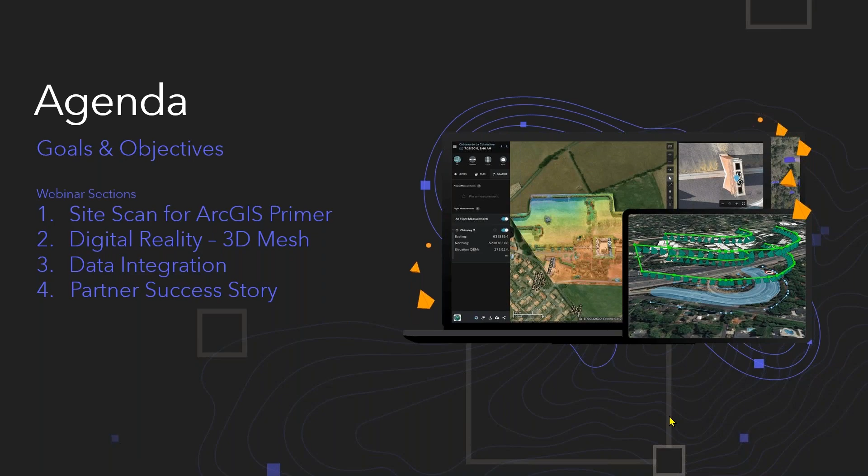So I now invite you to participate in our first poll. You should see the poll question pop up on your screen here. The question is: how would you describe your organization's drone program objectives? Are your drone program objectives focused on documenting and keeping record of site conditions? Do you intend to mostly share your drone data with project managers and key stakeholders? Are you more focused on gaining insights on site condition data, such as volumetric measurements or extracting features, monitoring change? Perhaps you find value in drone data by using it for marketing and brand promotional purposes. And then lastly, maybe you have another initiative for what your drone program objective would be. So if you could please just select your response.

Okay, I think that gives us enough time, we can now close the polls. I'm seeing the majority of you are looking to leverage this drone data to utilize in taking measurements and analysis and monitor change and so forth. It's really insightful, we appreciate your participation. Your feedback is helpful for us.

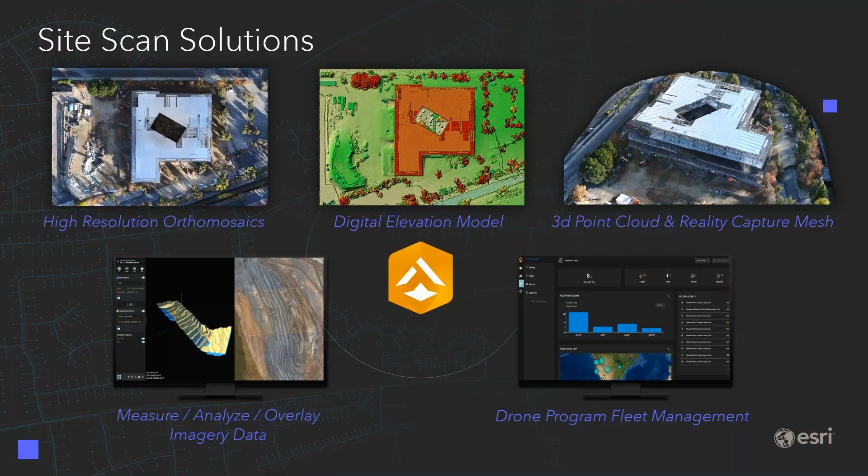Site Scan for ArcGIS workflows can be broken up into 3 distinct steps. Step 1, field planning and image capture.

This iOS mobile application has been built for the Apple iPad. It's built in a way to maximize image management capabilities, planning functions such as 3D mission setup and geospatial layer display.

Step 2, image data loading and management. This cloud-based interface contained within Site Scan has all the permission and account details set up, as well as the image management and processing engines that produce the aerial intelligence.

And step 3, data sharing, integration, and dissemination. This includes direct connections into core Esri software applications, as well as advanced image processing tools like raster functions and GeoAI. This includes automated image detection and feature extraction, as well as direct integrations to partner software portals such as Autodesk.

Now, I'm going to go into a little bit more detail about each one of these steps and the basic workflow. I'd like to highlight in the following slides more key functions of these features that relate directly to the webinar.

The Site Scan for ArcGIS mobile application is built on the ArcGIS Runtime SDK, and it contains pre-flight template modes that have been built to optimize and capture drone imagery data that will produce the best results. The flight modes have intelligent collection parameters like camera angle, image overlap, terrain following, and dynamic shape and size considerations.

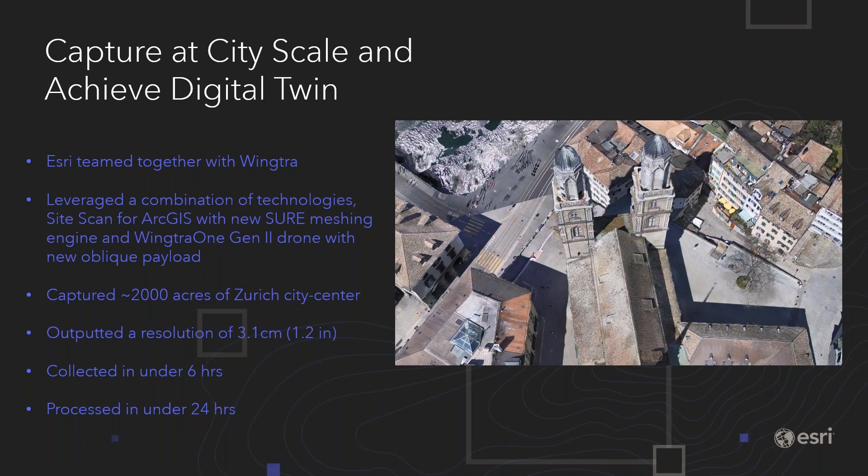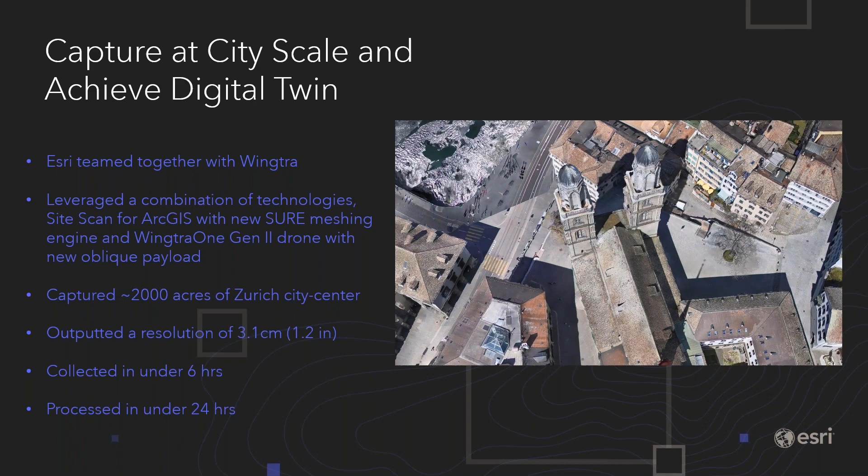More about this use case: the area captured covered over 2,000 acres of Zurich's city center in Switzerland, and it output a resolution of around 3.1 centimeters or 1.2 inches. Perhaps one of the most powerful takeaways from this case study is the fact that the WingtraOne drone was able to collect the imagery in under 6 hours, while the data was able to be uploaded and processed into the Site Scan Manager in just under 24 hours. Site Scan enables a new level of reality capture workflow that allows users to digitalize their environment and enhance the system of record using drone technology.

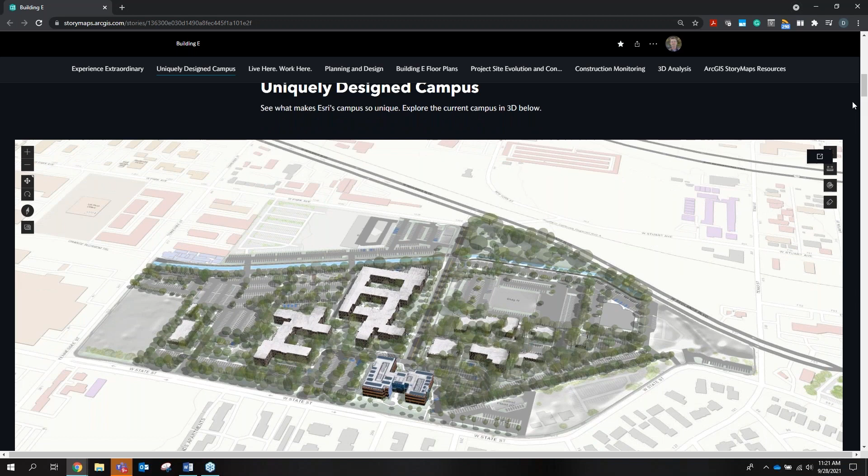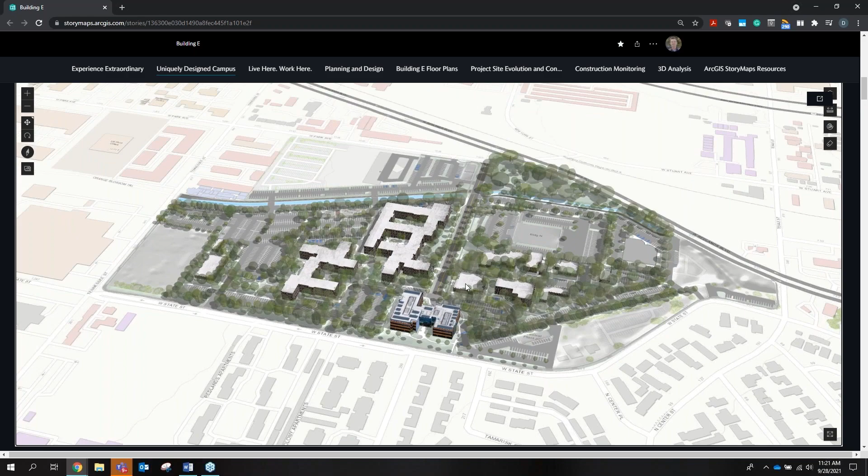So right away, what you see here is a 3D scene, and I will be touching more on the 3D scene capabilities later in this story map. But we want to give our investors, stakeholders, project team, and the public what the current state of our campus is today. We could show that through these very simple 3D multi-patch buildings as well as vegetation.

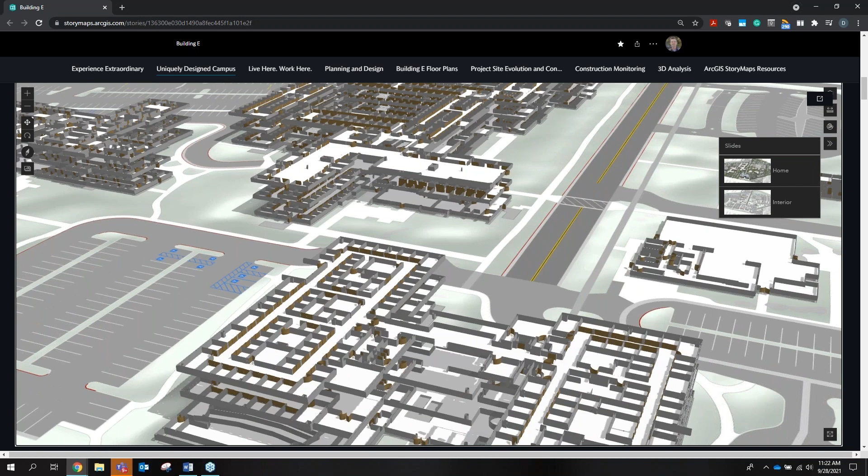What we'll be exploring later is maybe even bringing in the interior space of these buildings with ArcGIS Indoors, to give greater context to the size and contents of these buildings, and where our employees are going to be working at this campus in Redlands.

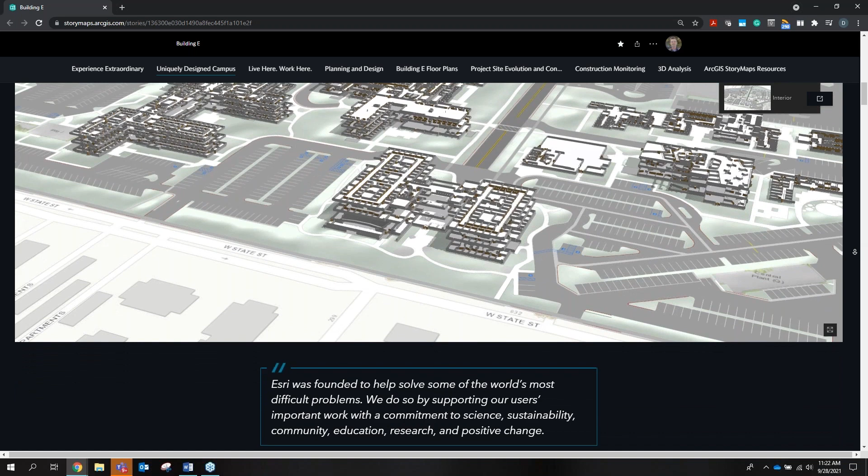So as we move along in this project story, we've now got a great sense of where this campus is and how many buildings we currently have.

Also, a great capability of story maps is being able to bring in dynamic quotes. Maybe we want to describe Esri further, and we also want to bring in more multimedia and photos to really create a story of what this campus looks like from the ground without actually visiting it.

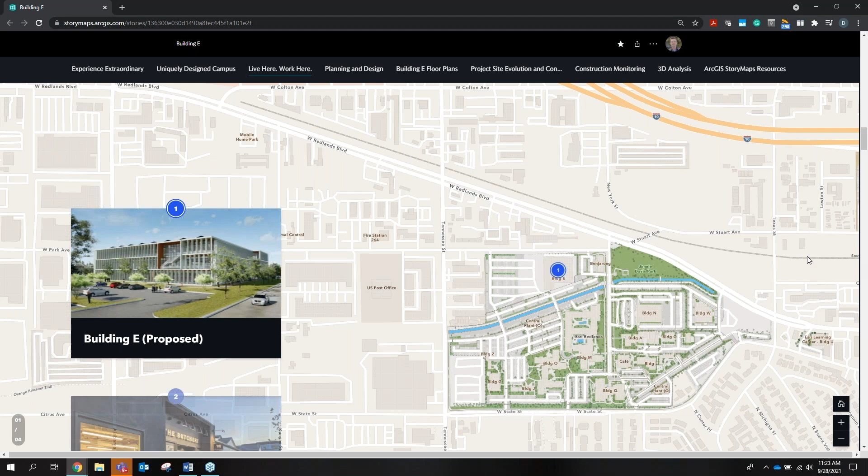Along with that, building is a pretty big investment, and we want to attract new people to this environment, to this campus. So a great storytelling capability built into the ArcGIS StoryMaps platform is being able to build a map without actually any feature services. In this case, we're going to create a guided tour of Redlands.

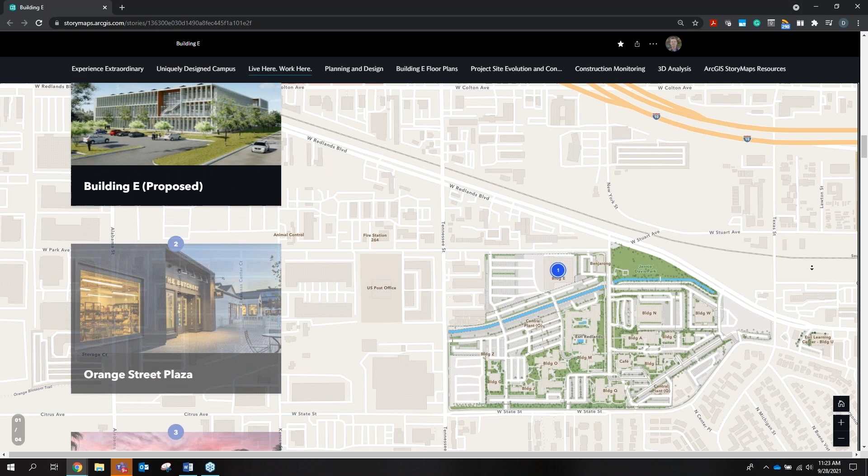So right away, we're showing where Building E is proposed. Maybe we want to showcase where some shops are, where people will want to shop, maybe some entertainment, in this case an amphitheater, or even on this next one, a golf course.

These are all built into the story map telling phase, and you don't need any feature services. You're not even using web maps at this point.

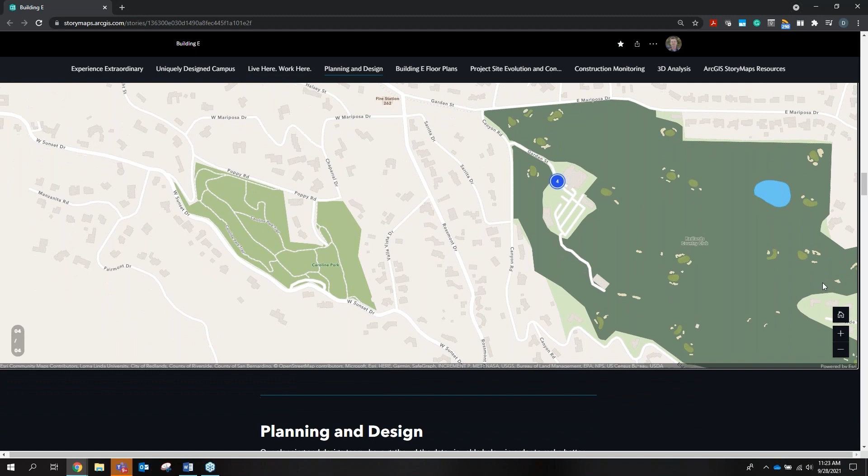But speaking of web maps, here's where we start to talk about the planning and design phase, now that we've gotten public engagement through this part of the story. Now, AECs, if you're familiar, need to have geospatial context. They need to be able to showcase that they understand the environment where these buildings are going in. And as a Sitescan user and an Esri user, you're able to automatically stream your Site Scan orthomosaics into a web map.

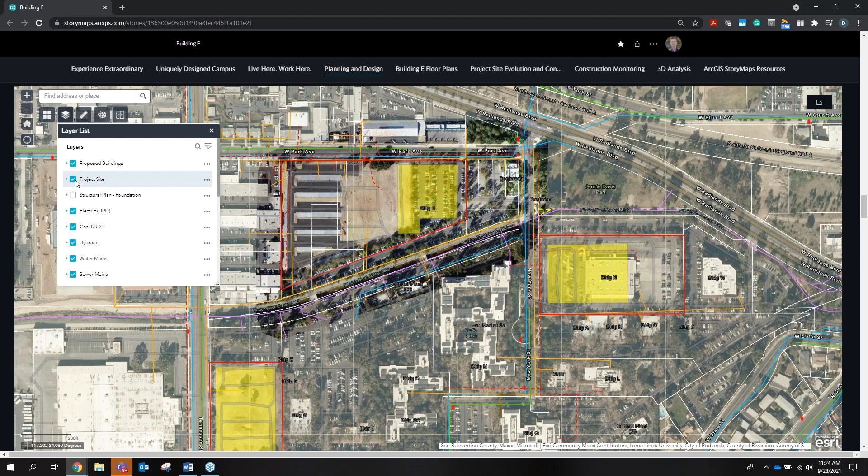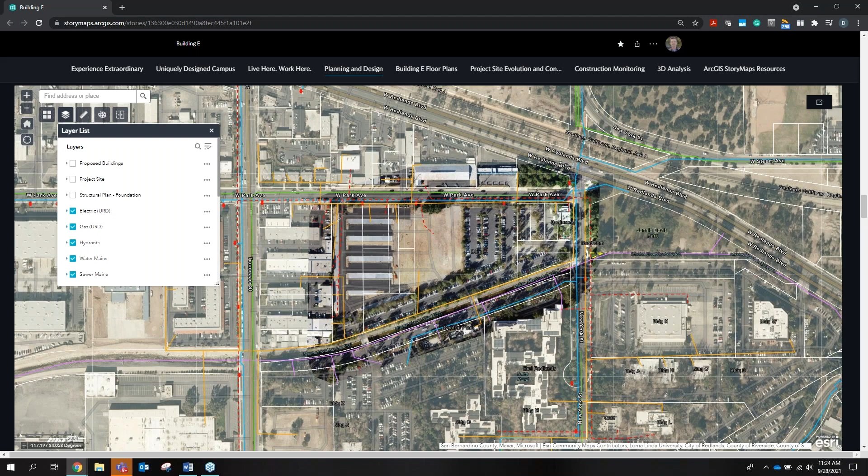Now, what we're looking at here are actually 3 proposed locations where this building may go in this scenario. Now we're going to key in on one specific area, and what you can see in the feasibility stage, you need to be able to showcase your utilities. These can come from your CAD design team, proposed utilities. It can also come from the utility providers as well as public data.

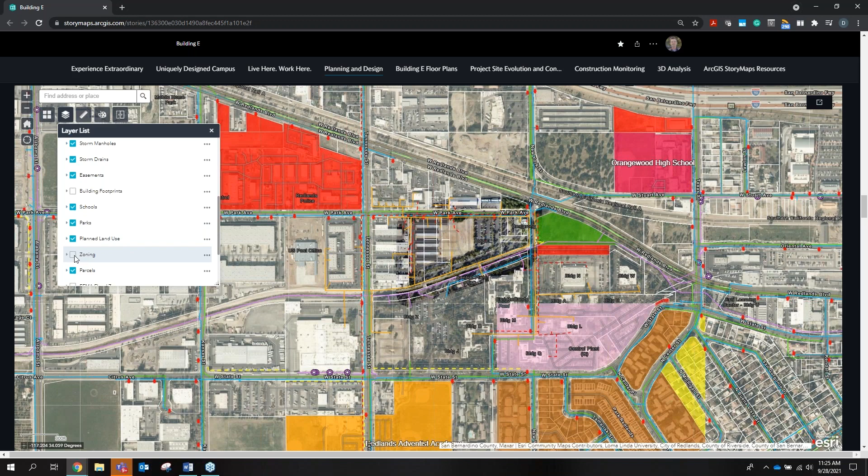So what we're looking at here on this building site is the actual utilities for this new building, but as well as understanding where the utilities are, we also need to understand maybe where schools are, and also parks and land use and zoning. And as an AEC, this really shows that you've done your homework on this site, and combining it with Sitescan just gives greater context to this new building and this story.

So web maps are essential in the Esri environment.

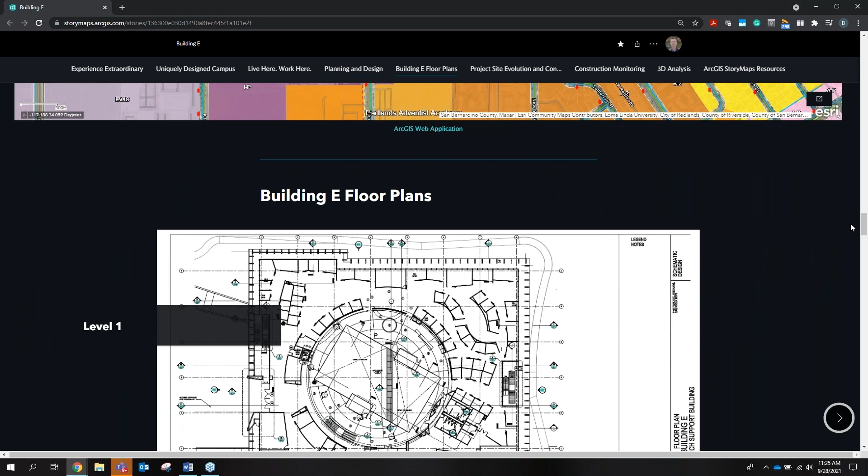Now also along in the story map, we can now begin the planning and design phase of actually being able to attach the building footprints and building floor plans, these PDFs. We're just simply attaching them to the story map to give our investors and stakeholders and public greater understanding of this project.

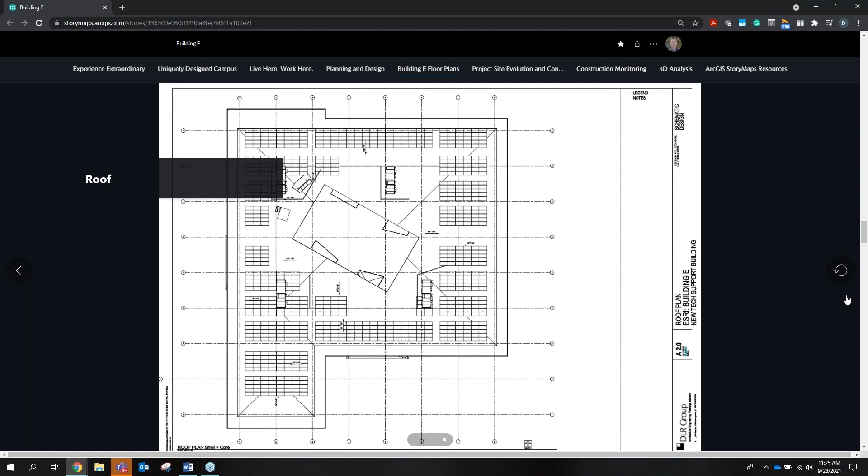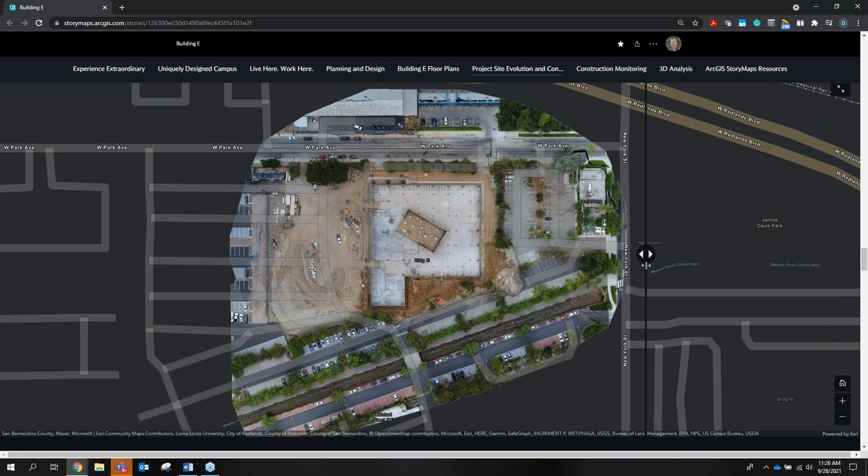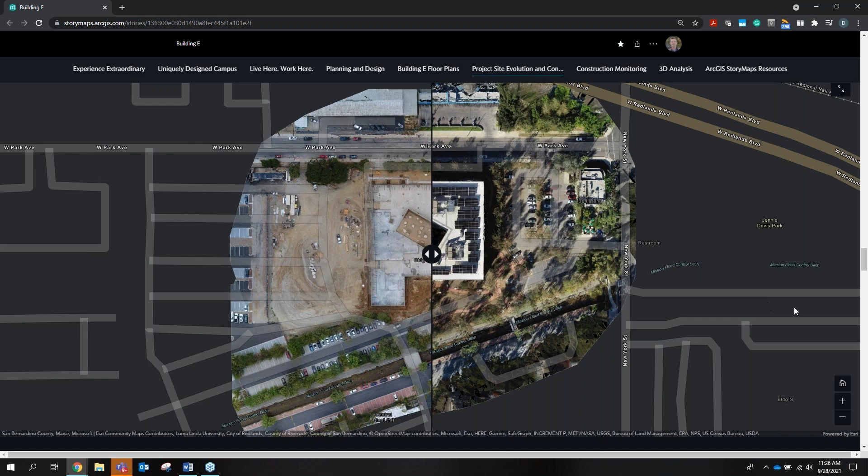So as we move through the planning and design phase, we actually begin construction. And if you're already a Sitescan user, you may be aware of using a time slider to be able to compare the beginning of your construction all the way through the end of construction. You can do just the same in story maps. You can embed your Sitescan orthomosaics along with our Esri base maps to give greater geospatial context of your construction site.

Now, I'd also like to talk about construction monitoring. And for this, we're actually going to be talking about a few other Esri products that you may be aware of as an Esri user. And if you're not, we'll be covering those here. So what we're looking at is a dashboard. Now, dashboards have become a hot topic over the past year and a half, with COVID especially. We've seen dashboards everywhere showing statistics and dynamic elements that are visually compelling. And the purpose of a dashboard is to give you that information quicker than you can just looking at a map or looking at some printed PDFs.

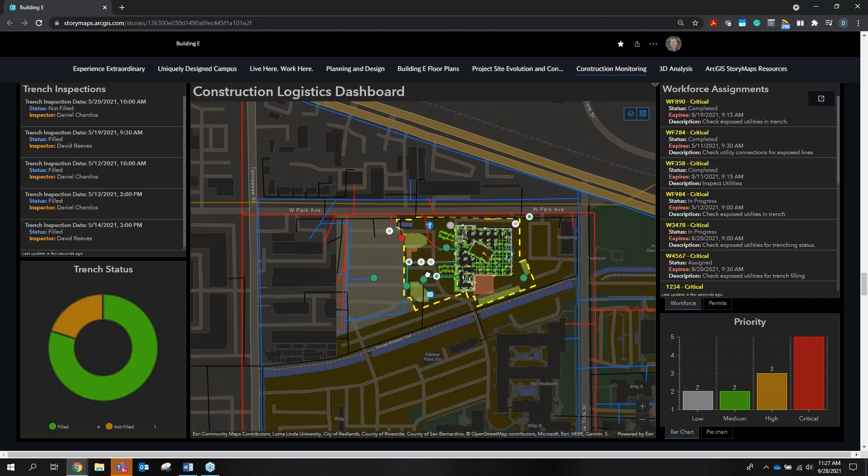So for this building, I'm actually going to zoom in. And when I zoom in, you can see that we've got our orthomosaic directly from Sitescan embedded into a web map, as you saw earlier. Now, in this case, this is actually the construction phase.

So we're bringing in elements from our CAD design team, as well as our GIS team. So here we have the structural foundation of our new building, as well as some very important elements that we'd like to monitor - the actual construction workforce as they're out on the site.

We have features such as the trenching of our building. As you saw earlier, it's important to know where your utilities are. So the trenching that you see here is new trench in order to tap into those existing utilities that are actually going to bring life to this structure and connect it with the environment around it.

We also have these yellow polygons for laydown areas, as well as red polygons for areas that we really don't want our workforce to be having boots on the ground in these locations. These are areas where there could be some safety concerns at the job site.

So as I mentioned earlier, what we're bringing into this dashboard is all these features to give visual context, but we also need a work assignment system, which we'll be talking about. ArcGIS Workforce is a product that is basically a to-do list. Your dispatcher back at the office can assign work assignments to your construction crew, and those assignments will be completed on the site, and you can view that all in real time here.

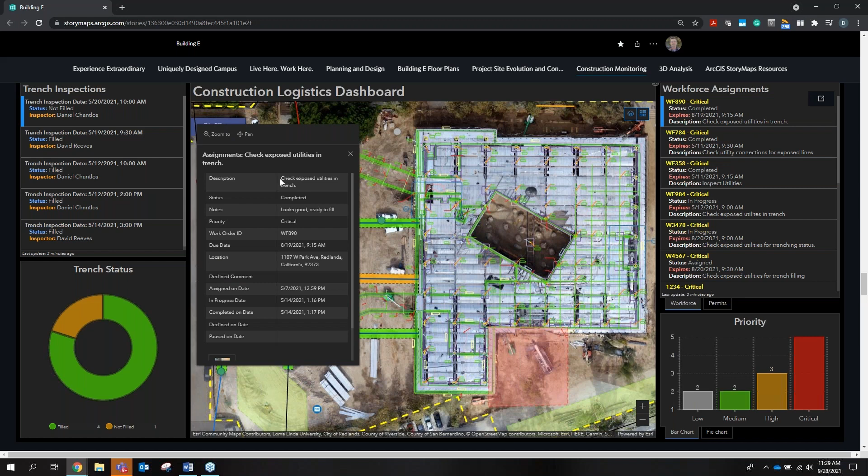This is just a very simple, quick visual analysis of our current state of the job. Now, also workforce assignments, we have a point-based assignment system, as we have here on the trench. We've got a couple of assignments, and here we can see some completed assignments where we had a construction worker go and check for exposed utilities before the trench is filled back in.

We need to make sure that the utilities are all connected and everything looks good before we go and bury them to connect to the other utilities. We can view them by priority, as you see down here, our work assignments that are low, medium, high, and critical priority. This is all valuable information that the dispatcher and who has access to this dashboard can view in real time.

Now, as I mentioned earlier, we have these red polygons. Behind ArcGIS Workforce is another product called ArcGIS Tracker. This can track your construction crew with boots on the ground in real time using the GPS of their mobile devices, and ArcGIS Workforce is once again a mobile solution for your field crew.

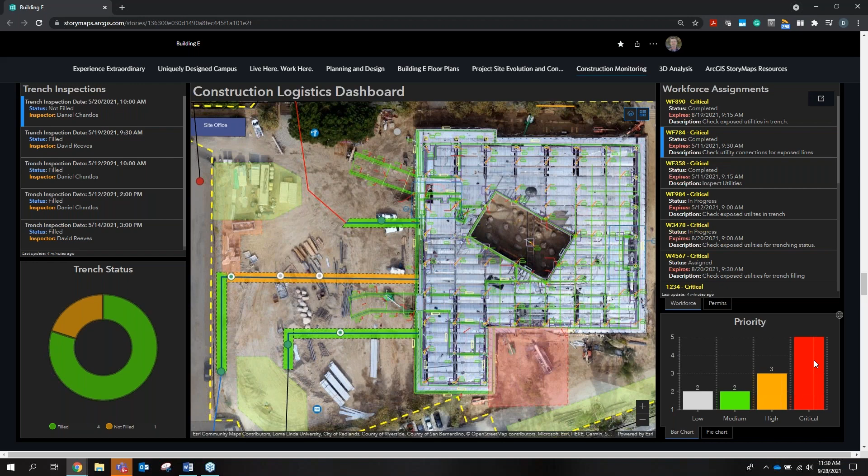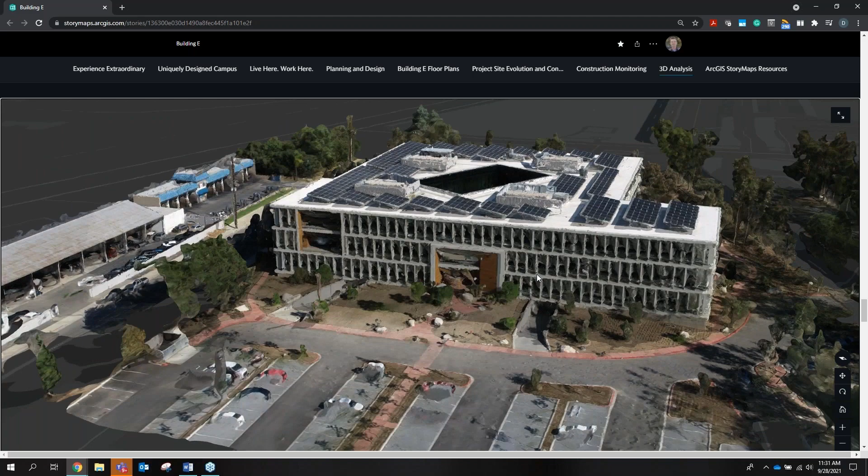So this is our construction monitoring phase of the project. Now, as we are constructing the building, we're flying with Sitescan to create these great meshes using the Sure processing engine behind Sitescan. We're able to also embed those meshes into our story map, as you can see here, to view the current status and construction of the building. Those meshes that are generated from Sitescan are brought directly into our story map.

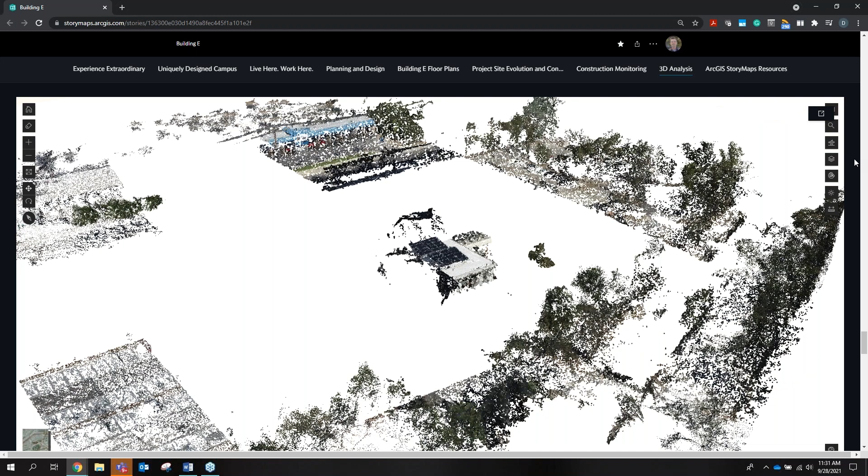So along with our 3D tools while we're constructing this building, we're able to embed our scene viewer from ArcGIS Online or ArcGIS Enterprise directly into our story map. And if you know anything about our scene viewer, it's got a lot of great capabilities that we'll cover today.

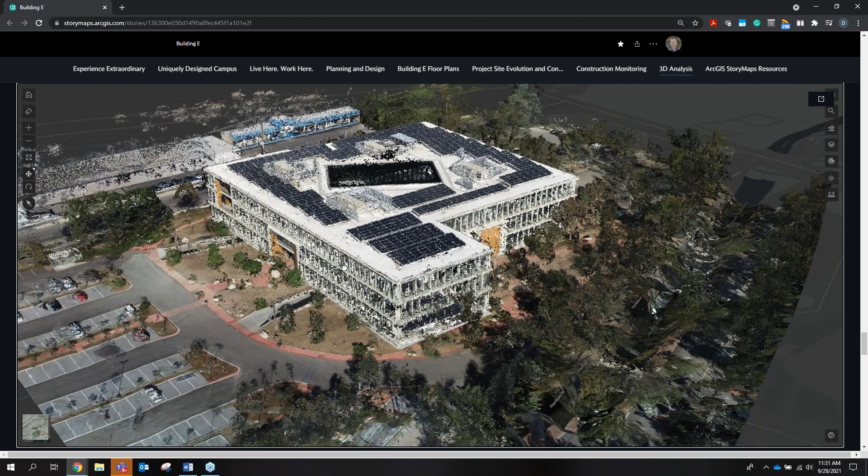So one other data output from Sitescan which I haven't talked about on the story map is actually our LiDAR point cloud from our orthomosaic, our flight from Sitescan. We can bring that into our scene viewer along with the 3D mesh and the 2D elements that you saw earlier. Now, the scene viewer is capable of showing your true color point cloud, as well as an elevation point cloud, and even a classified point cloud, which we'll touch on here.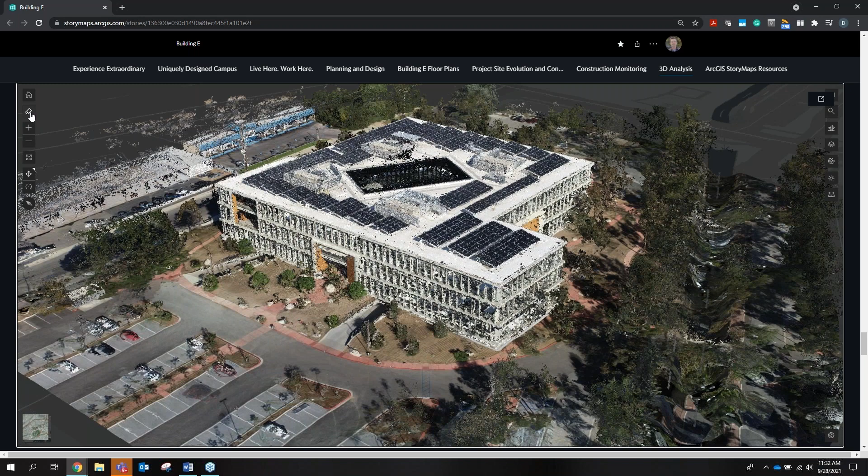So with the scene viewer, we're able to have our keyframes of our campus, and I'll switch back to the overview of our campus here. The overview of the campus really shows those 2D elements. Here we have our building footprints extruded into 3D shells to provide greater geospatial context.

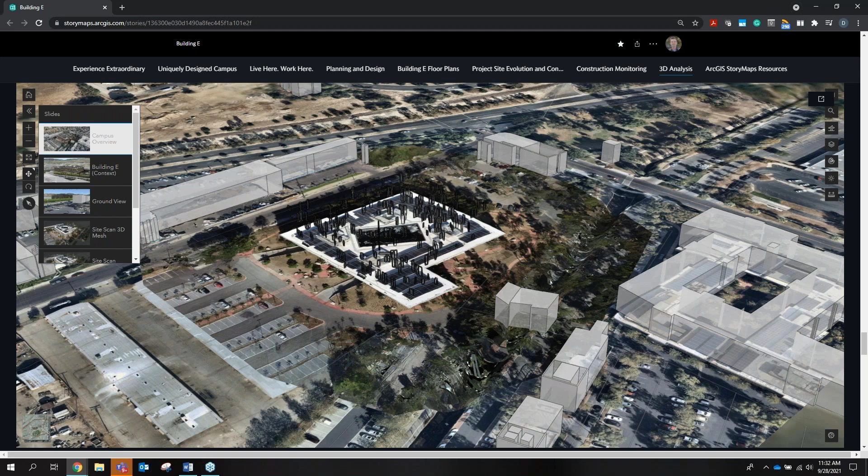We have our Sitescan orthomosaic on the ground, and then we also have, through our Autodesk Alliance, the ability to read Revit models that we can combine with all of that other rich context and data together into our scene viewer that you see here.

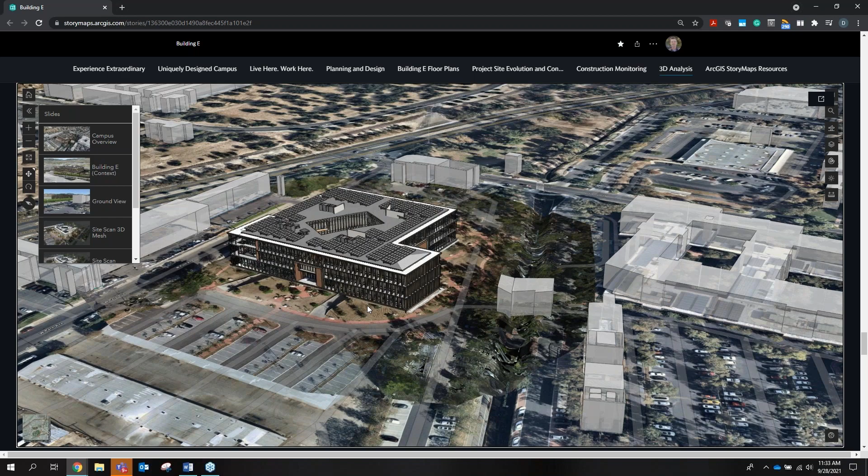Now, the Revit model is the design model from our design team. So we can bring that in to actually view what the project would look like at its constructed phase without the project being constructed. And we can also use the scene viewer to fly to different areas of the project to view different angles without having boots on the ground, without actually visiting the site.

We can view this from the ground along with our other buildings, and right away another feature shows up that I'd like to discuss. The vegetation that you see here, these trees, using the Sitescan point cloud, we can actually talk about another Esri solution called our 3D base map solution. This will take that classified point cloud and extract your vegetation layers or building layers and create 3D objects from those. We're able to extract the vegetation classification and then create trees that we can use in our scene to provide greater context for our viewers.

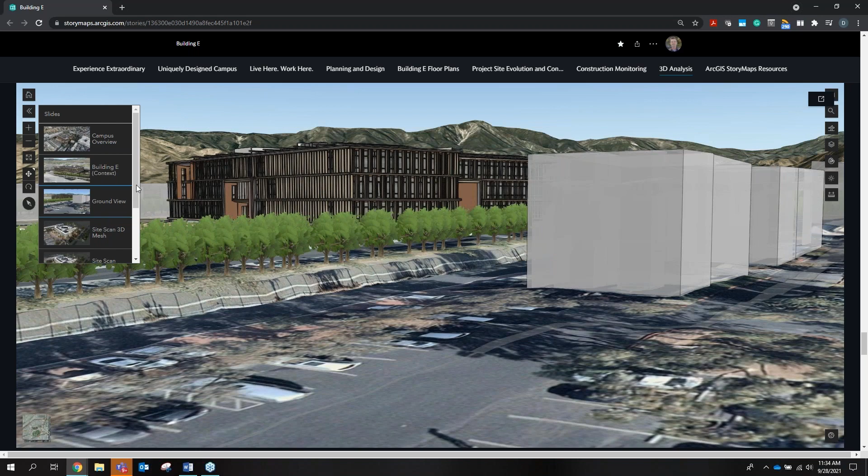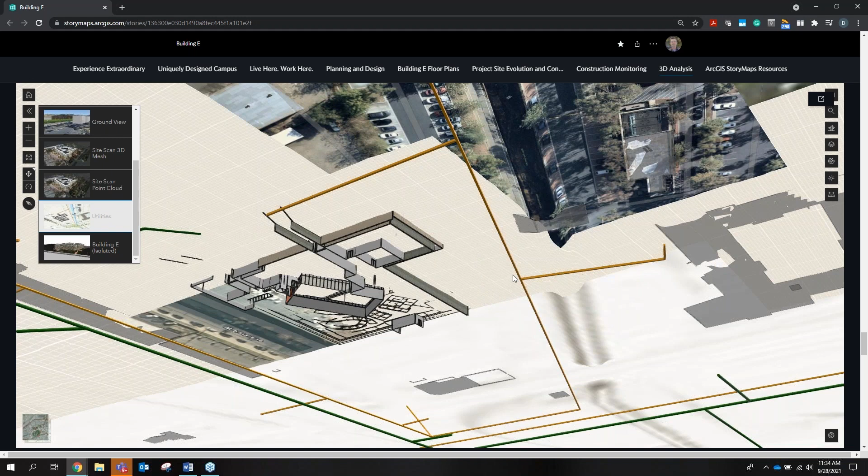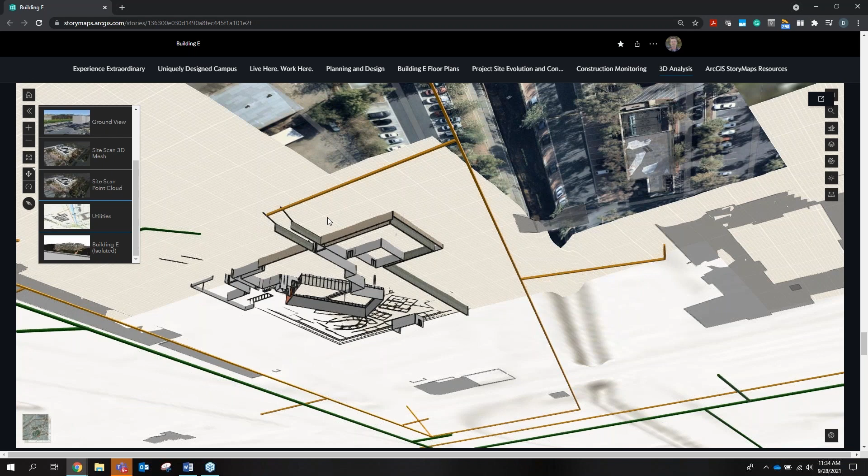Now, as we mentioned earlier, we also talk about utilities. We view those utilities in 2D, and that's great and all, that's been done many different times. But what we can do now is actually view those utilities in 3D beneath the surface. So here we have our utilities, and it's just a tad slow, but these utilities are just beneath the surface, and we can really examine where they're going to connect to the building below the ground to provide that greater context to the entire building project story.

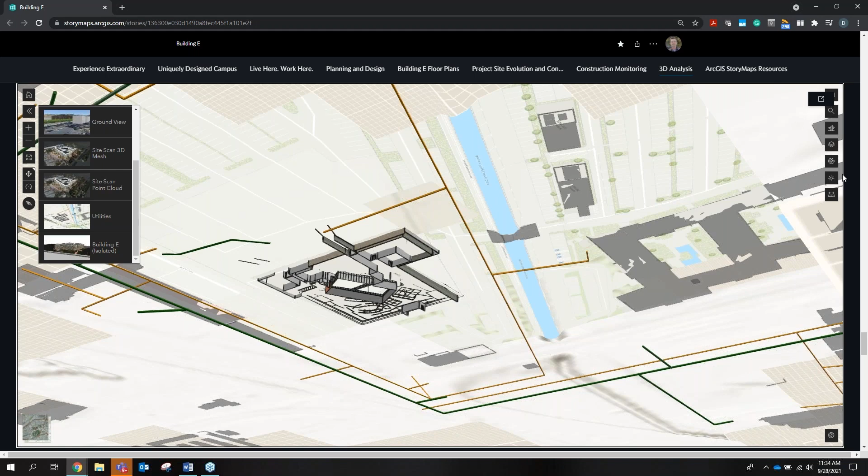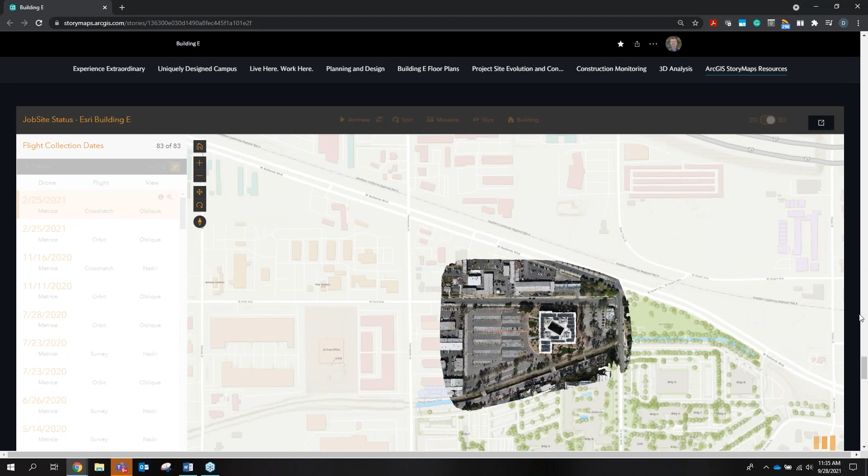The last application I'd like to talk about today combines your design data with your reality capture data from Sitescan. As you can see, we've got the Revit model of this new building along with our mesh created from Sitescan. Once this mesh loads, we're able to visually see the contrast of what the designed Revit model is compared to the reality capture.

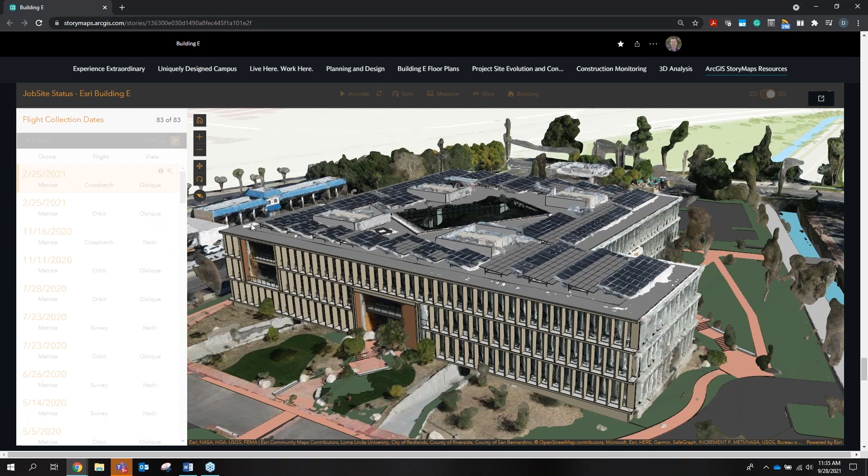Maybe some elements changed, like the solar panels having to change placement on the roof structure. I'm just going to open this in a separate tab for viewing. Should load very quickly.

Another great feature of this application is being able to load all of your existing drone meshes to view them from the beginning of the project lifecycle all the way through the end of the construction lifecycle. So while this is loading, we're going to turn off the Revit model and go back to the beginning of this construction.

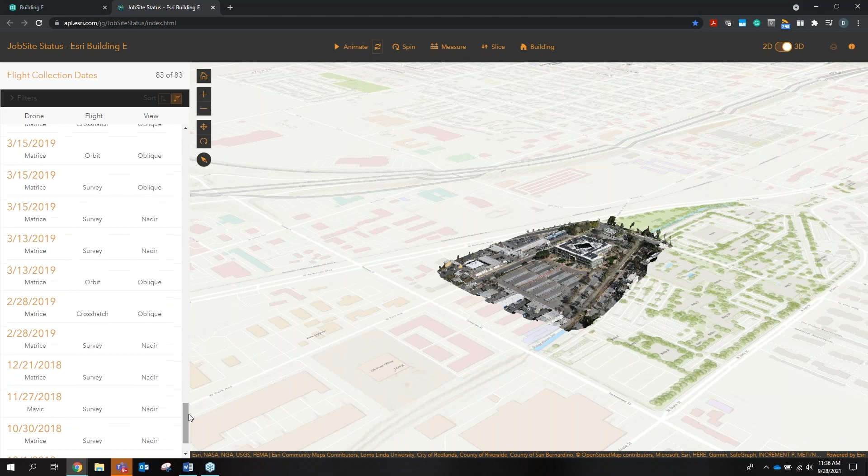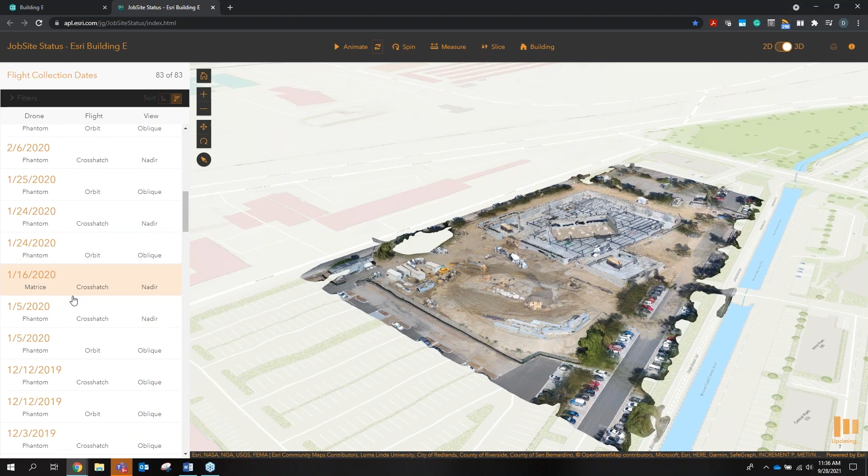Very quickly, the Sitescan orthomesh loads, and we can view different months to see the different construction phases of the project captured through Sitescan, viewed in our Scene Viewer application in the ArcGIS environment. If we skip ahead, we can see the foundation has been laid, and we can go through this all the way to the very end, to the final constructed phase.

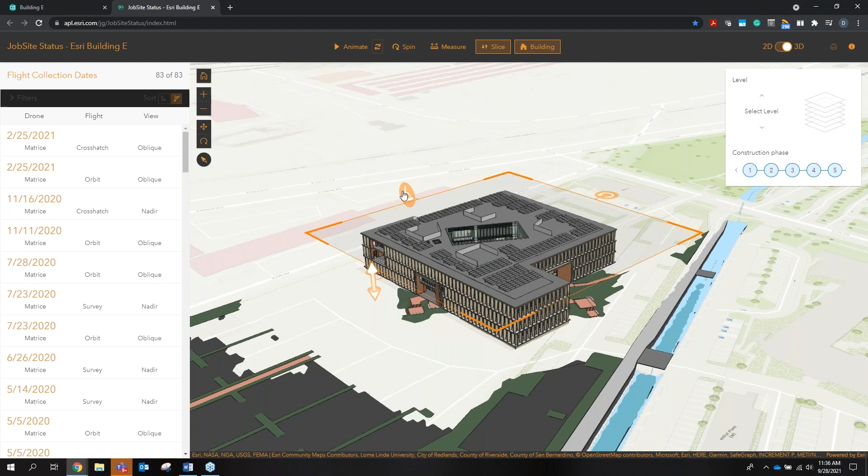We'll load in our Revit models again. What we have here is actually a building slicer tool. I'm going to turn off this mesh. Our Scene Viewer has these great widgets that allow for great 3D analysis. We can dynamically slice directly into the building, view the different sections, and view different floors one by one, very easily and dynamically.

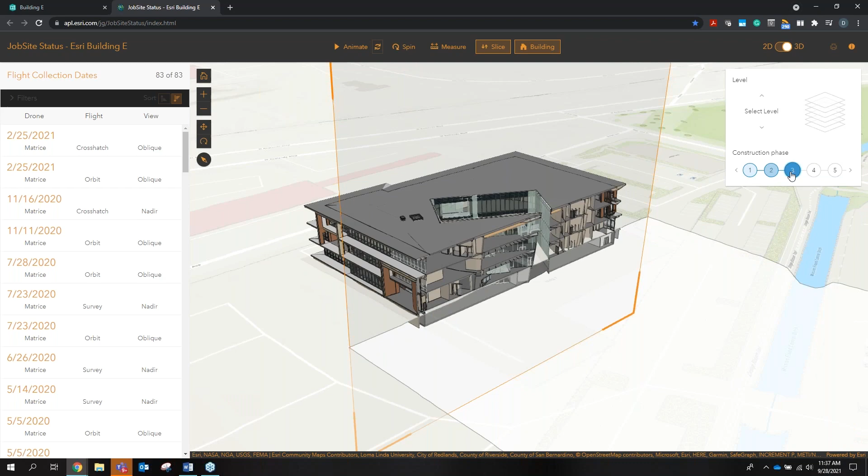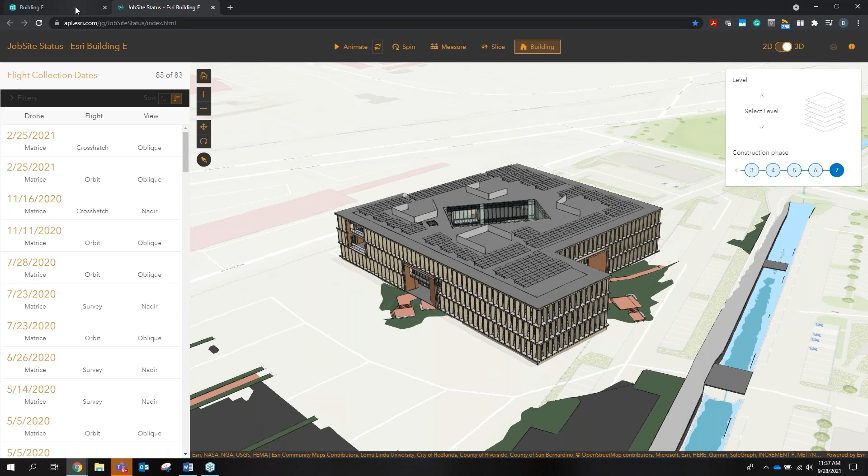We can view different construction phases from one all the way through to the very end. We can spin this around. What's great about this is being able to show the different teams involved through this construction lifecycle, the different elements they helped design for this building, as well as all those different reality capture flights captured through Sitescan.

We have a lot of great resources about story maps online for you to learn more, including our user conference videos about story maps. I really wanted to present today this great building project story that takes you all the way through the public engagement phase, to the planning and design phase, through the construction monitoring phase, all the way through the 3D analysis that's available.

With that being said, I'd like to hand this back to Andrew to present another poll question.

Hey Dan, thank you so much. It's absolutely fantastic to showcase how drone imagery really is part of a bigger puzzle with all this other modeling and drawing and design. Sometimes as drone operators, we can get into our little bubble, performing volumetric analysis, distance measurement, building a topo, but within our organizations, the imagery and high resolution meshes can provide value to other folks telling other stories about a particular project. I love how it all comes together in your example. I'm pleased, thank you so much for showing that.

I'm going to now move over to a third poll for everybody.

This poll question is related to hardware being considered or utilized by your organization. We are all familiar with the behemoth of DJI in the industry, and it does seem to be reflecting in the poll responses. Looking like we do have a good 20% hold on the other. So any other candidates, I'd love to get your feedback on the hardware you're using, maybe in the chat or question window. If you could put your manufacturer, it's always great for us to know what's coming online and what's being utilized by the industry. Appreciate that feedback, everybody. I'll ask the moderator to close the poll.

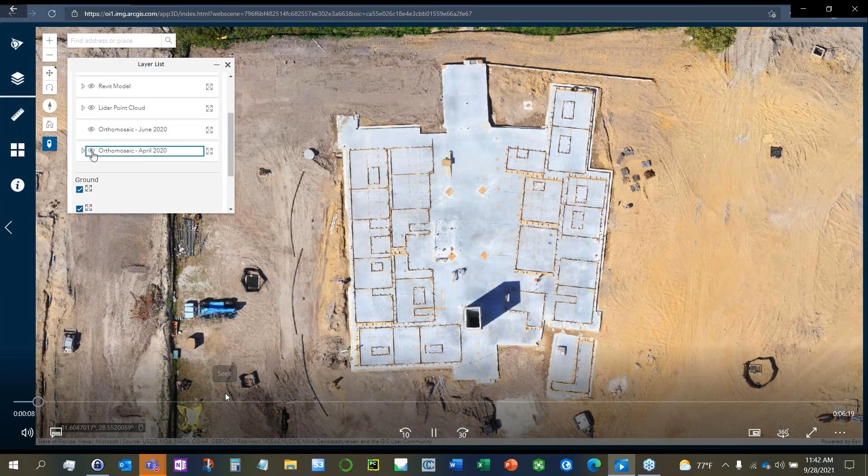Okay, we're going to start here with the imagery base map in ArcGIS Online. When I turn on the drone imagery processing, used Sitescan for ArcGIS, we can see a few examples of the orthomosaics that were produced in Sitescan for ArcGIS. Using the drone imagery, we can visualize the change on the construction site.

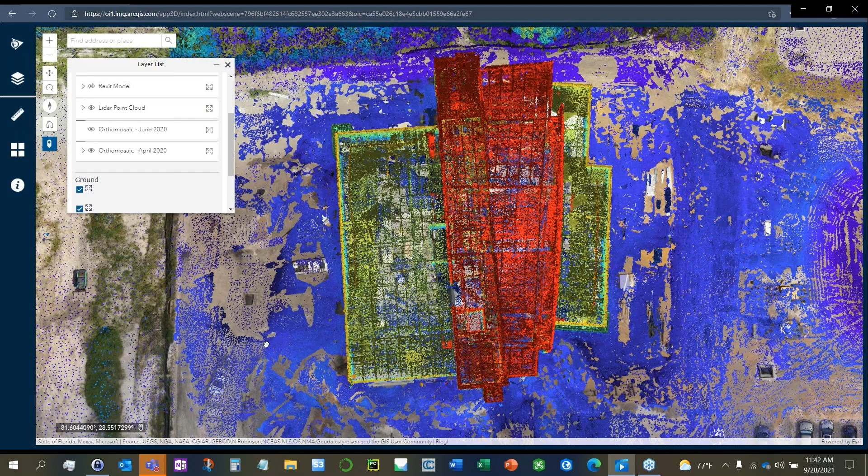Moving into the LiDAR point cloud, first visualized and rendered with elevation data so that cool colors represent low elevation and warm colors represent high elevation. And using a 3D scene like this, we get an incredible realistic perspective of the project area.

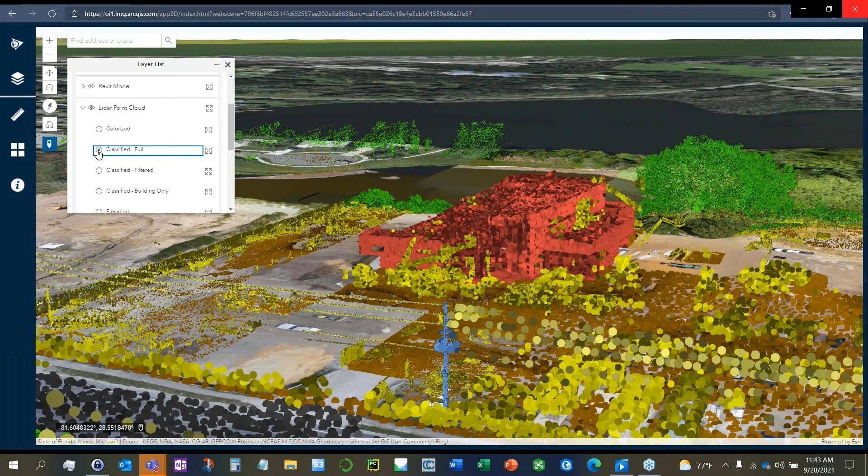This point cloud is published to ArcGIS Online as a scene layer package, and so we're able to stream the points all over the web using ArcGIS Online.

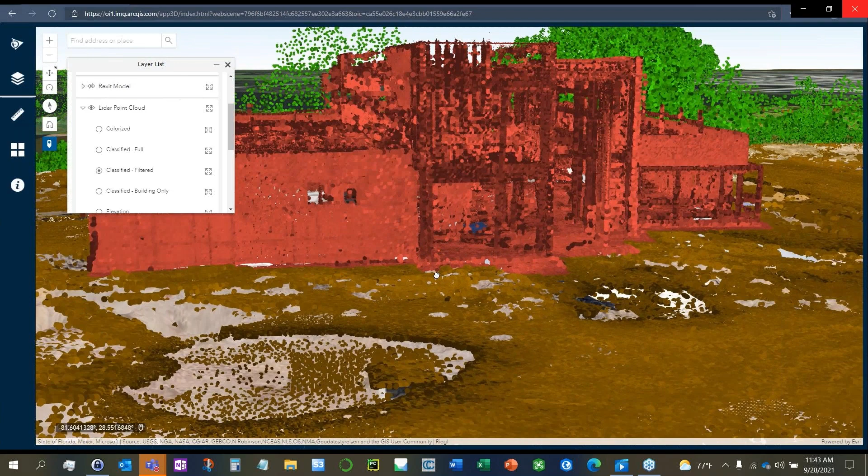We classified the point cloud in ArcGIS Pro using our point cloud classification tools, both automated and deep learning methods. And with a classified point cloud, we can begin to extract features, create terrain models, and remove unnecessary points from view for a much cleaner experience.

Filtering the points to just view the building points gives us a really great perspective on how we can work with these data.

Riegl also collected imagery along with its LiDAR acquisition, providing a completely colorized LiDAR point cloud for a realistic view.

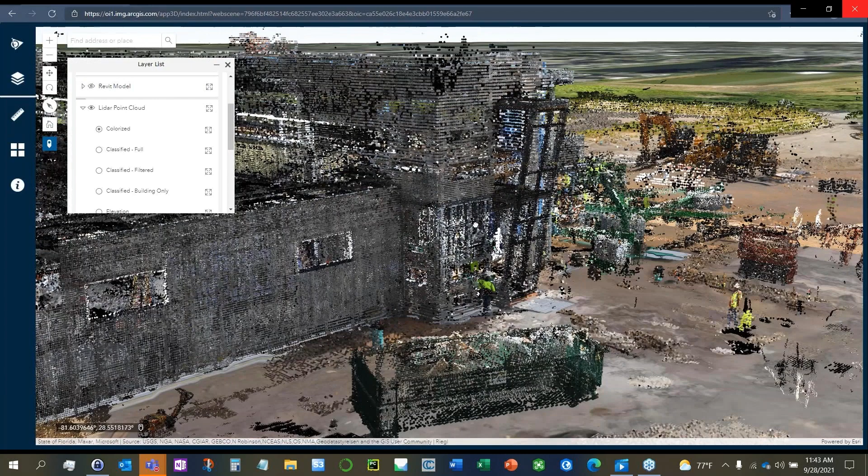Those of us not used to working with point cloud data often find it easier to understand a colorized point cloud like this. And I like to see all the people working on site within the point cloud.

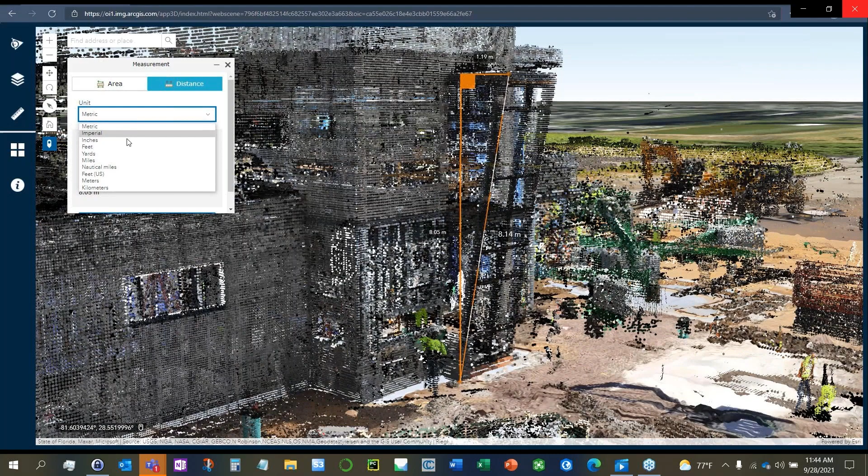I'll use our measurement tools to get a quick measurement using the point cloud, and this gives us a really nice way to get a precise measurement in view. So I'll just take a quick measurement of this building entryway. And since my team likes to work in feet, I'll go ahead and switch units.

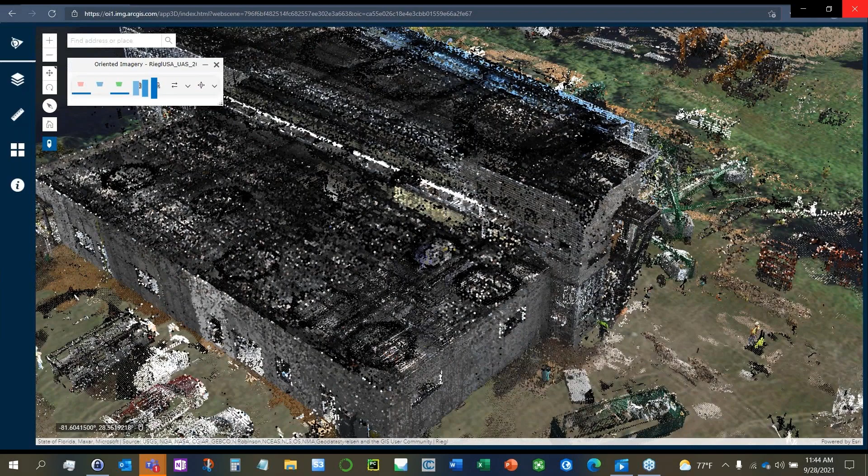We can do more with this though, and we can enhance this experience by leveraging the raw drone images using oriented image catalogs. Oriented image catalogs allow us to bring in imagery alongside our point cloud. So I'll go ahead and load one in now. Just by clicking anywhere on the point cloud, it brings up that raw drone imagery collected for that spot.

This allows us to inspect changes on site and make better decisions by using the high-resolution drone image capture data. You can see the footprint and orientation on the point cloud.

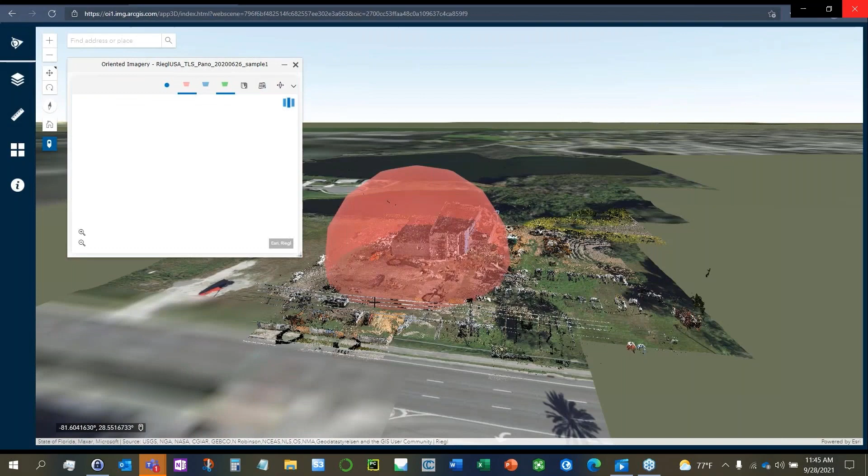For this project, Riegl was able to collect more than just drone imagery. Their terrestrial and mobile platforms also collected high-resolution panoramic images. These not only helped us colorize the point clouds, but also provided a unique perspective for the sides and even the interior of the building.

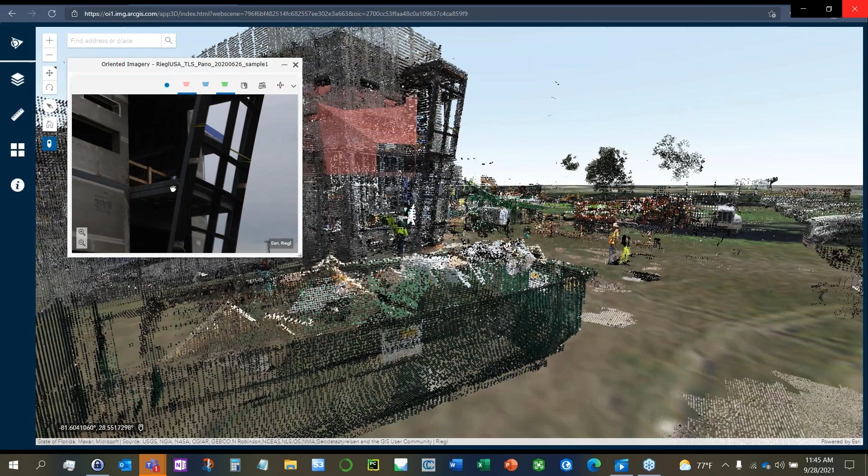Oriented image catalogs are a great way to not only leverage your drone data, but also your 360-degree cameras, panoramic images, and even video collections. These powerful tools can be combined on the web for a unique inspection experience, allowing project managers and field crews to stay up to date with project status.

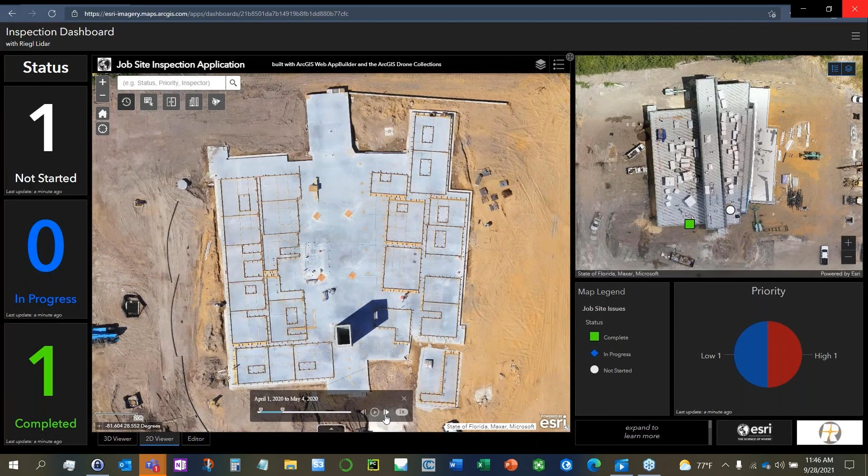Let's take a look at a dashboard that we helped create to inform field crews of potential issues on site. We'll first bring in drone imagery published as dynamic image layers using a new way to host image services, which we call ArcGIS Image for ArcGIS Online. This time lapse was able to visualize each project phase.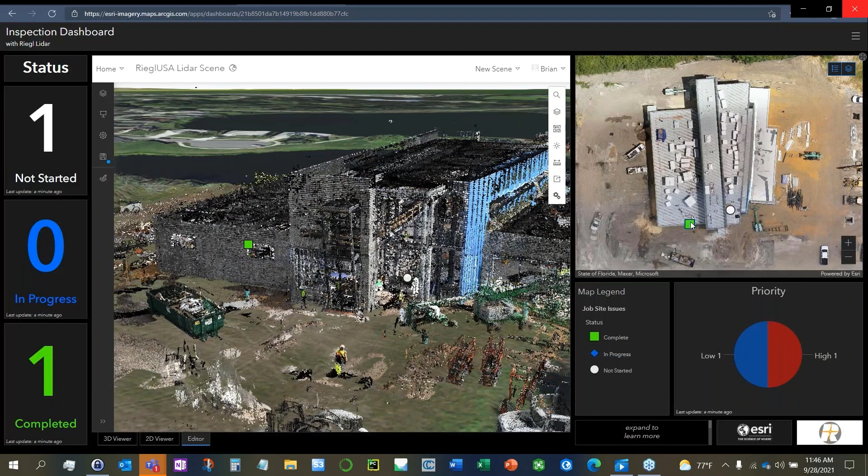So next, heading over to 3D, I'll turn on a layer so that we can begin to add inspection points for field crews. You can see the attributes on the existing data that is there, and we could add new ones using the editor tool.

Directly within the web scene, I'll add a new task for a worker to take care of that I need done. So let's go ahead and have somebody move this dumpster out of the way. I'll give it a title and a date, and this will inform my field crew on what they need to do today.

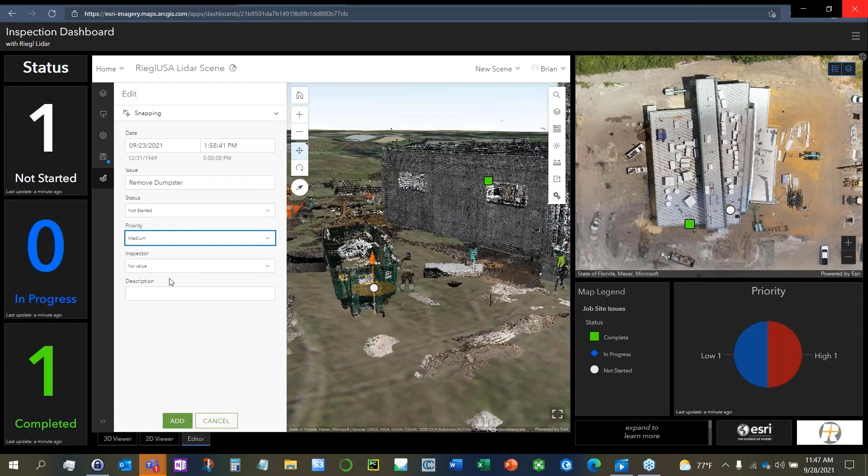With their tasks assigned, they can complete the job and immediately update office crew when their work is done. Project managers can visualize tasks and filter them by priority or status, or wherever you set up your dashboard. Collaboration like this has never been easier between field and office crew.

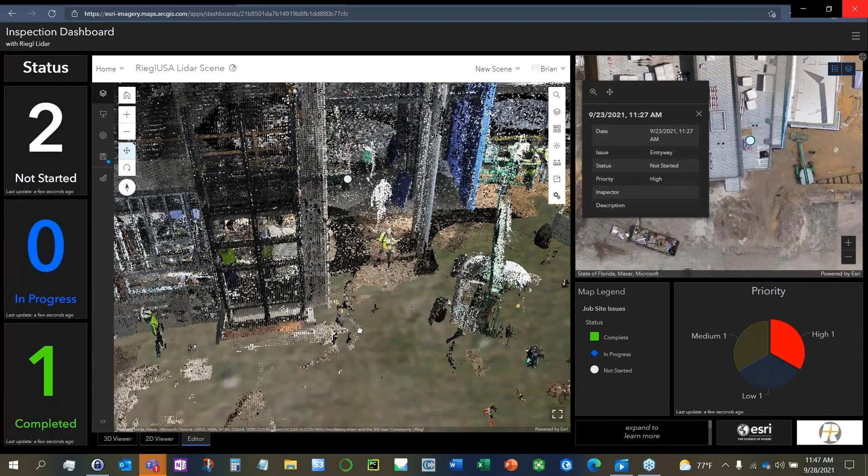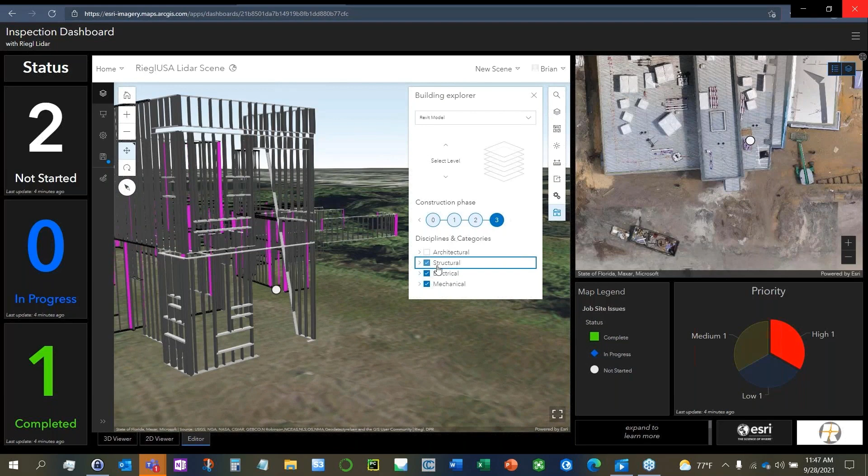And similar to how Daniel showed how Autodesk products can be brought in, I'm going to turn on the Revit model, which can be used to assess as-built and design data. So within the web scene, we can filter the Revit model for structural information, electrical, or other utilities. And this gives us the ability to immediately work with this 3D data in our web scene.

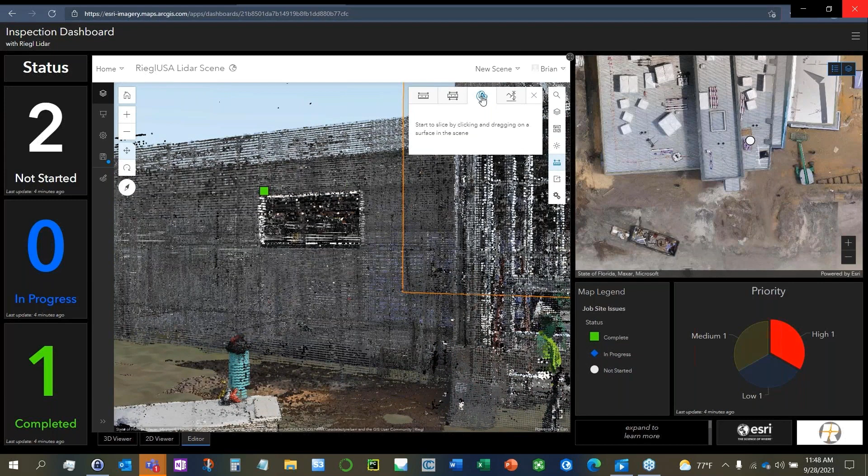But what I was really impressed with was how well the LiDAR data aligned with the Revit model. I'm going to use the slice tool so I can go inside the building. This allows me to navigate easily, but also allows me to intersect and work with specific layers at a time.

Because Riegl collected interior LiDAR as well, using their terrestrial LiDAR scanners, we could see the activity going on in the building. I'll wrap up by just taking a quick measurement of this door frame.

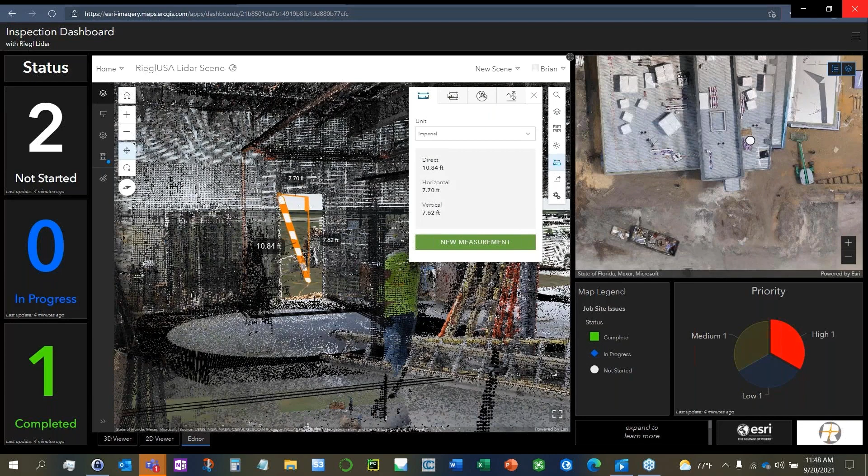And so with the power of ArcGIS, combined with both drone and LiDAR data, we're able to create an incredible web experience to help keep all our stakeholders and project staff informed. And with that, I'll pass it back to Andrew.

Thanks, Brian. Fantastic data set there from our partners at Riegl. It goes along with the themes of today's webinar, which really are showcasing how this remotely sensed data can be shared with an organization and gain that intelligence associated with remotely collected data and how it all comes together.

So let me make sure my screen is being shared here, and we're just about approaching our Q&A session of today's presentation.